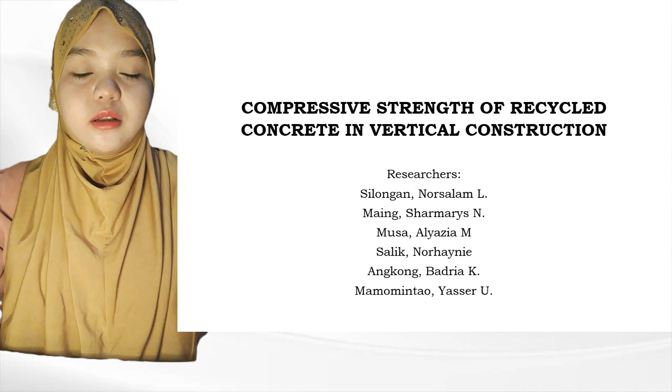Our research is entitled Compressive Strength of Recycled Concrete in Vertical Construction. I am Norsalam L. Silongan together with Sharmarys N. Maing, Badria K. Angkong, Alyazia M. Musa, Norhaynie Salik, and Yasser Mamomintao.

Introduction. Background of the study: rebuilding and renovation of roads and buildings is a long process, and a large amount of money is required to buy materials such as cement, aggregates, and etc. Usually, after demolition, the concrete pavement is just piled up in one place, and because of this, the land piled up becomes useless. With regard to the aforementioned issue and problem, we are inclined to recycle crushed concrete pavement as a coarse aggregate in concrete mixtures, with the goal of reducing the burden on the people and the government so that there is no need to spend large sums of money on building and renovation.

The advantage of recycling concrete is that aside from being able to save money, the landfill material will not be wasted. Instead, it can be used for projects to be built in the future. The purpose of this study is to determine if recycled concrete can be used as an alternative for coarse aggregate. Moreover, we're aiming to provide a solution and avoid the excessive spending of large amounts of money on building and renovation projects.

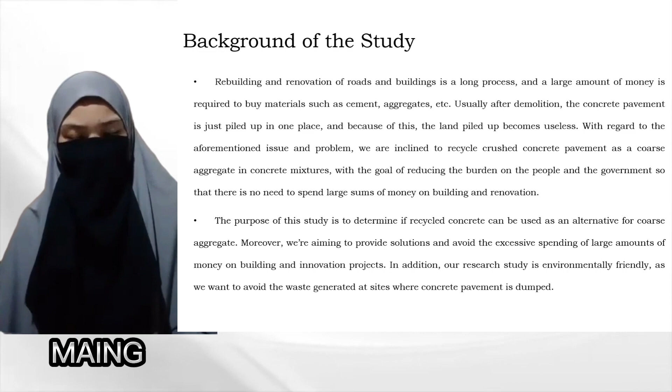Review of related literature. Studies by Wen, McLean, and Willoughby in 2015 have shown that using recycled concrete aggregates or RCA in concrete pavements can lead to reduced cost, decreased environmental impacts, and faster project delivery times. Rudnicki and Zurczak evaluated the compressive strength of recycled concrete from the A6 motorway pavement using an EN 12390-3:2019 test process, finding values of 65.8 megapascal for the upper layer and 51.2 megapascal for the lower layer. This meets specification for various types of road construction.

Rahal's study found compressive strength values ranging from 36.2 to 40.6 megapascal, while Zhou and Chen's study showed that recycled concrete formed with different types of recycled aggregates can achieve compressive and flexural strength equivalent to or exceeding those of traditional concrete.

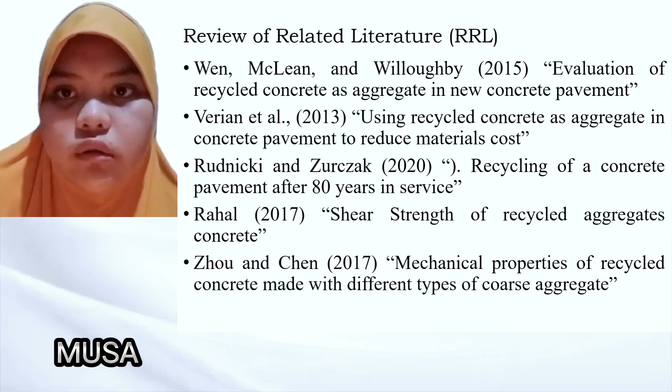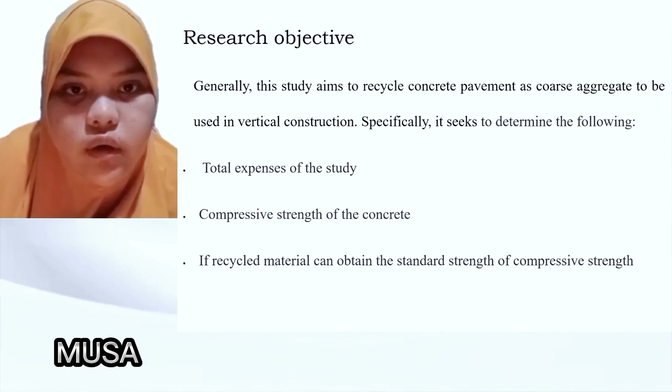Research objective. Generally, this study aims to recycle concrete pavement as coarse aggregate to be used in vertical construction. Specifically, it seeks to determine the following: total expenses of the study, compressive strength of the concrete, and if recycled material can obtain the standard strength of compressive strength.

Our conceptual framework shows the input, process, and output of our research from the figure above. The materials needed for the research are concrete pavement, cement, and water. We also needed to undergo laboratory tests for its compressive strength. With these materials and process, we will create concrete using recycled materials.

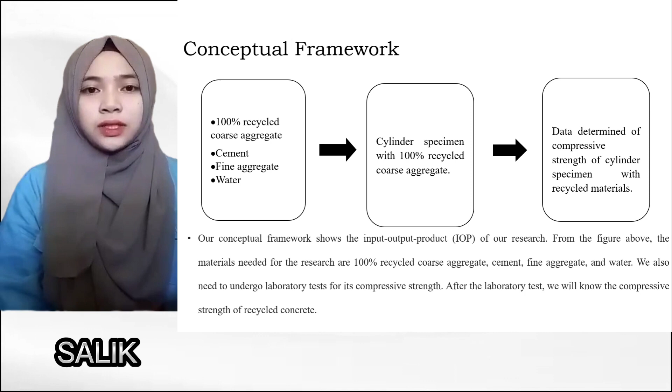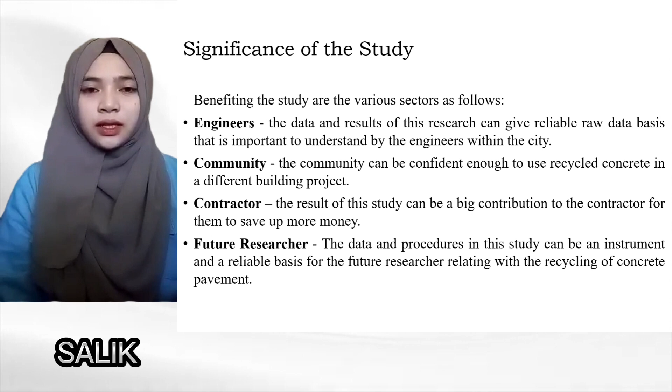Significance of the study. This study aims to provide solutions to some problems such as the excessive amount of money spent on building and renovation projects and the waste generated at sites where crushed concrete pavement is dumped. In addition, this study aims to provide information and knowledge about determining recycled concrete pavement as an alternative to coarse aggregate in the concrete mixture to be used in vertical construction.

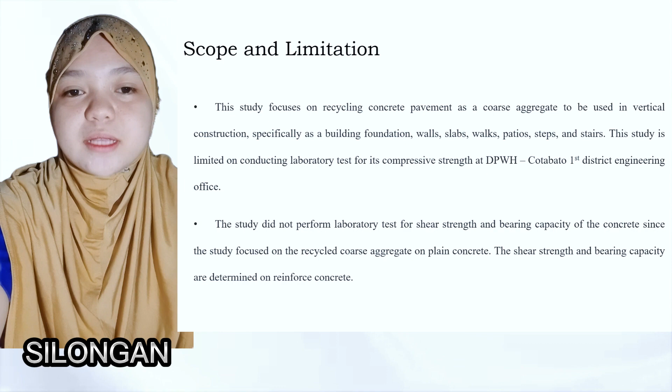Scope and limitation. Our study focuses on recycling concrete pavement as a coarse aggregate to be used in vertical construction, specifically as building foundation, walls, slabs, walks, patios, steps, and stairs. This study is limited to conducting laboratory tests for its compressive strength at DPWH 1st District Engineering Office. This study did not perform laboratory tests for its shear strength and bearing capacity of the concrete since the study focused on recycled coarse aggregate on plain concrete. The shear strength and bearing capacity are determined on reinforced concrete.

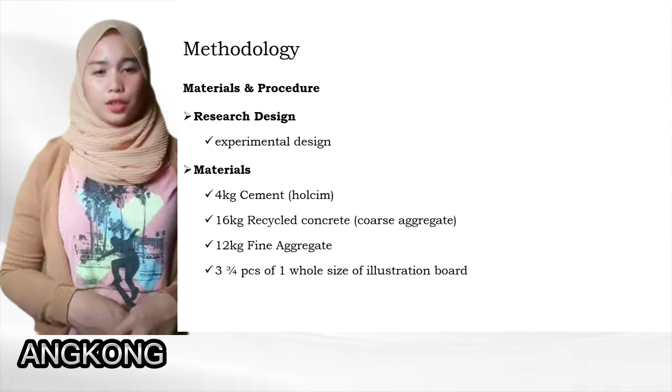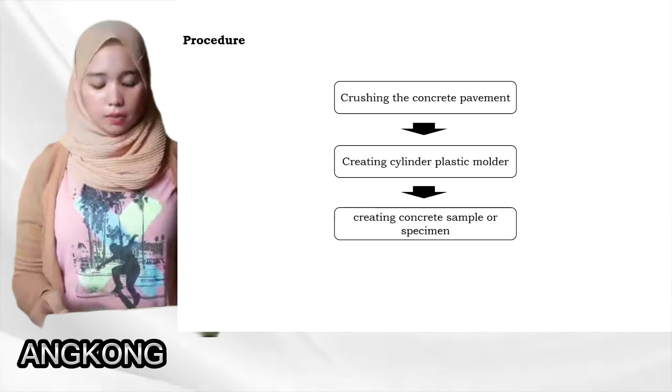For the methodology, the materials we use are 4 kg cement, 16 kg recycled concrete, 12 kg fine aggregates, and 3 3/4 pieces of one whole illustration board. The procedure is: first, crushing the concrete pavement. Second, creating cylinder plastic molders, and the last one is creating a concrete sample or specimen to be tested at DPWH. Chapter 3, Result and Discussion.

From Table 1, which shows the result of the laboratory test for compressive strength, we tested 6 sample concretes with a dimension of 150 mm as height by 75 mm as diameter. From the first 3 samples, we attained loads of 70, 75, and 90 kilonewton. For the other 3 sample concretes, we attained 85, 50, and 50 kilonewton load, with a curing period of 14 days.

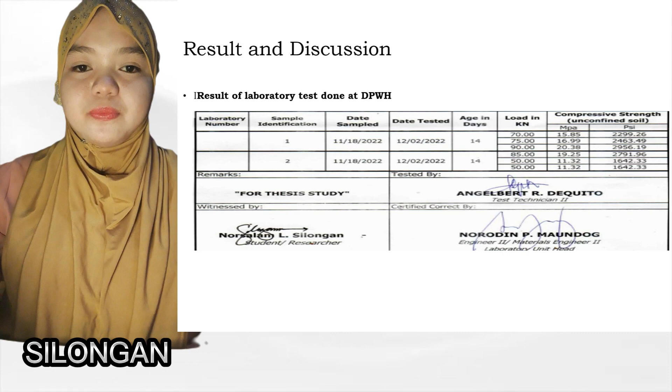The standard strength for compressive strength is 2,500 psi. From our test result, we gained 90 kilonewton, or 2,956.19 psi. Even though we encountered many errors in creating our product, we still managed to attain the standard strength for compressive strength, which is 2,500 psi.

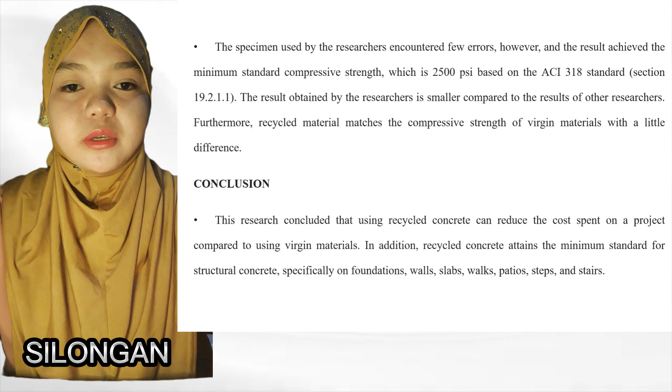Comparing the compressive strength of virgin material and recycled material, recycled material can attain the standard strength for compressive strength. However, virgin material is stronger than the recycled material, with just a little difference. Researchers encountered many errors in creating the product, but still managed to attain the standard strength for compressive strength. With that, the researchers concluded that recycled material can match the virgin material in terms of its compressive strength. The researchers also concluded that using recycled material can reduce the cost spent in building and renovation projects compared to using virgin materials.